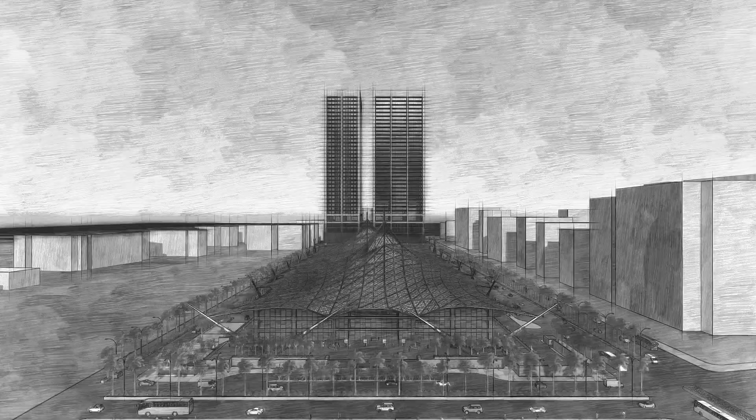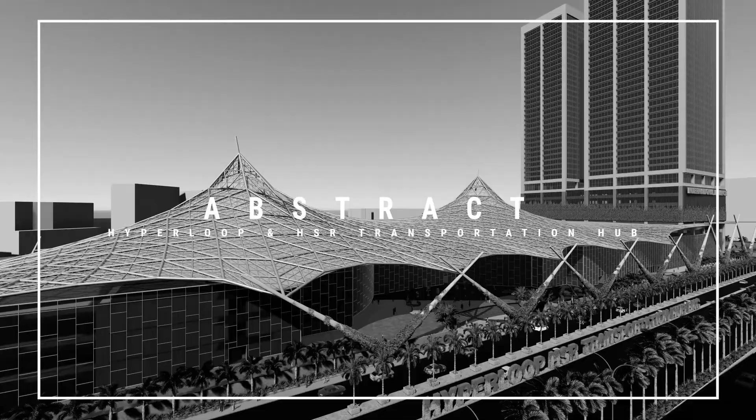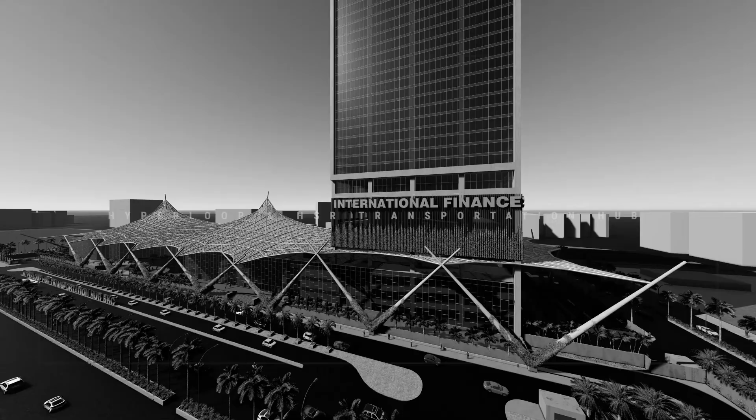Advancing technology and rapid urbanization has led to a resurgence in population growth, which pushes the transport system to simultaneously expand, improve, and innovate. India, being one of the fastest growing economies, invites the proposal of Hyperloop and HSR as a means of travel and the International Finance Service Center for its commerce.

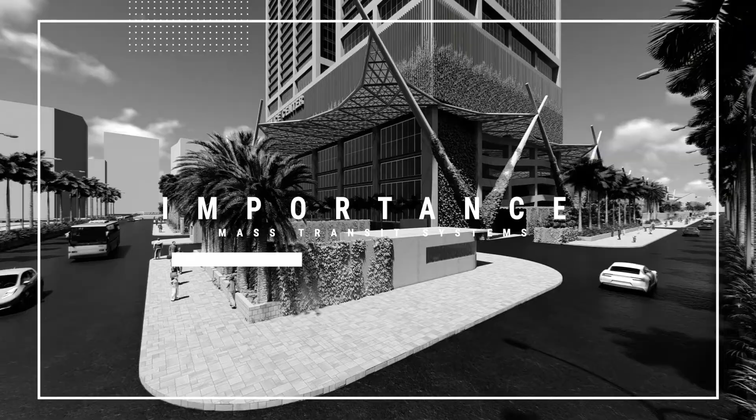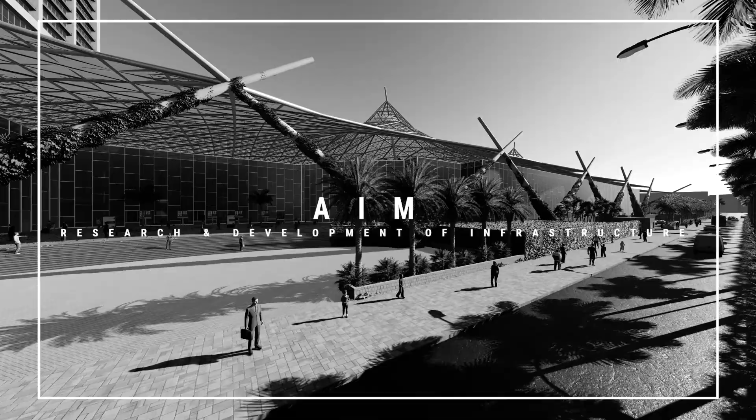The means of inter and intra-city movement is a critical element for defining a city's physical, social, and economical characteristics. Mass transit systems are vital not only for the smooth functioning of the city but also for creating its identity. The thesis aims for research and development of infrastructure of the proposed Hyperloop and HSR transportation hub as a mixed-use development, integrating the proposed International Finance Service Center. The system, being at the innovation forefront of transportation, demanded a research-oriented design procedure, which was the USP of the project.

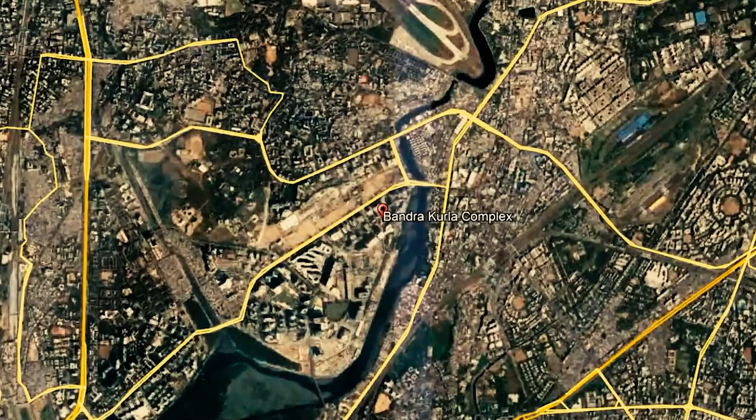The HSR and Hyperloop line is proposed from Ahmedabad to Mumbai and Mumbai to Pune, creating an opportunity for an integrated mixed-use transportation hub starting from the Bandra Kurla Complex, which is one of the most prominent planned business districts.

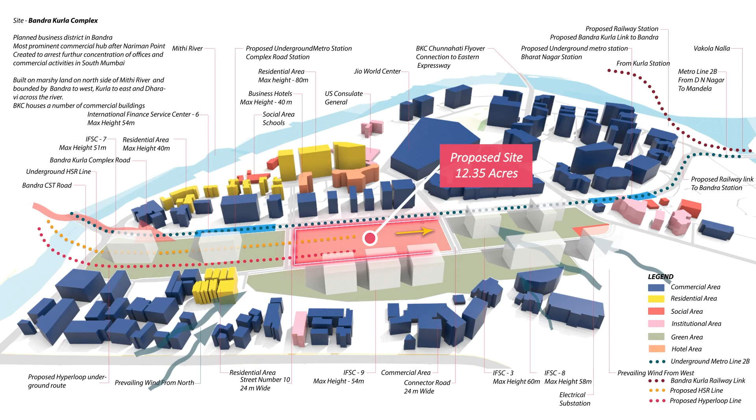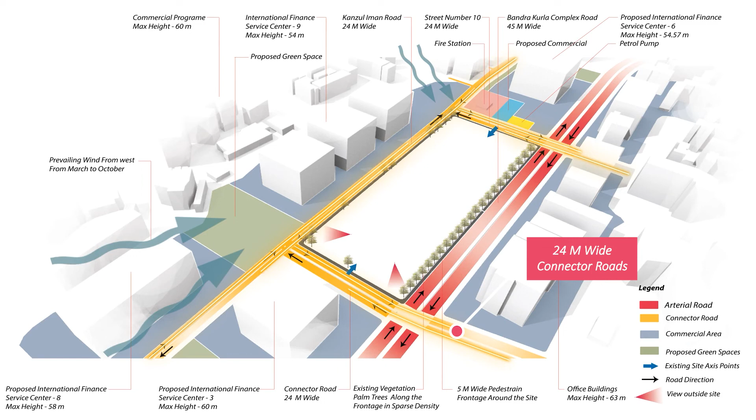The site, being accessible from all four sides, a central location in BKC, connectivity to other transit systems, and a proposal of International Finance Service Center gives an opportunity to create an icon for the precinct and an identity for the city due to the typology of the project and the corresponding context.

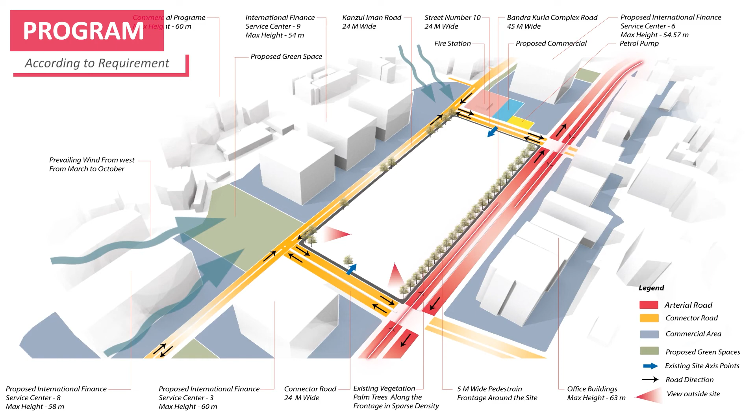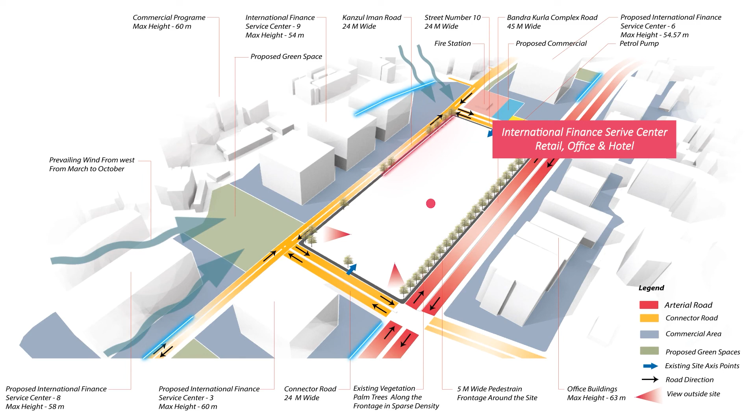The site, with an area of 12.35 acres and allowable FAR4, houses two components of functional program, namely HSR and Hyperloop Transportation Hub, and International Finance Service Center, which is subdivided into retail, office, and hotel spaces based on the requirement of the site.

The vision was to create a gateway which not only helps in the smooth functioning of the city but also creates its identity. The design aims to express movement and importance of urban infrastructure through its futuristic architecture, program, and scale.

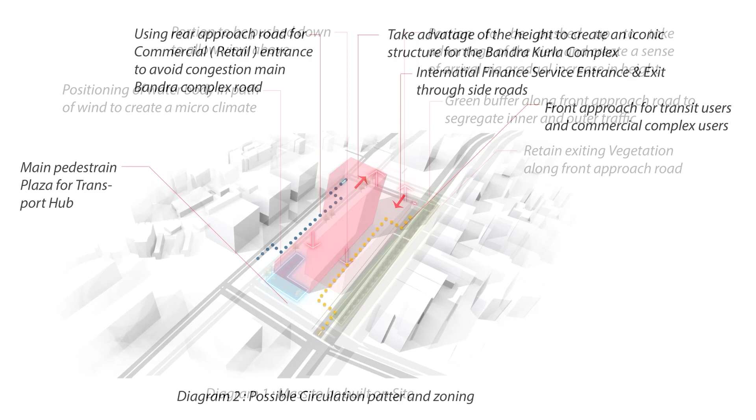As a response to site condition, position of water body and green buffer was conceptualized. Efficient and segregated circulation pattern for different typology of users were fixed, which resulted in a conceptual massing and zoning of different functional programs for the project.

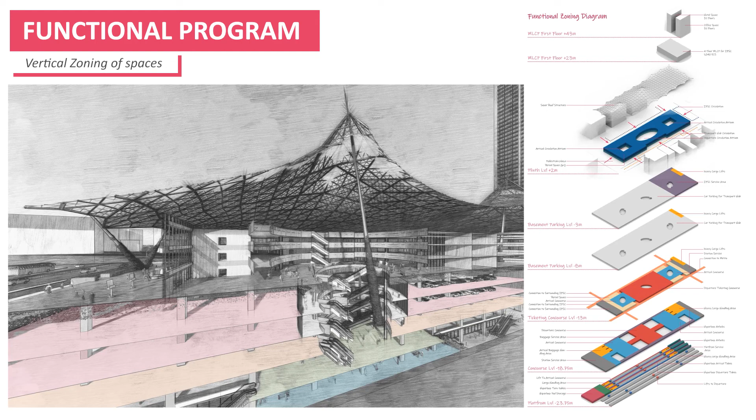Due to the complex program, vertical zoning of different typology of functions addresses a unique solution to the segregation and circulation required for each function.

The ground level acts as a main entryway for the transportation hub, planned with sufficient retail activity to support the commerce, which extends beyond, creating an open recreational rooftop cafeteria.

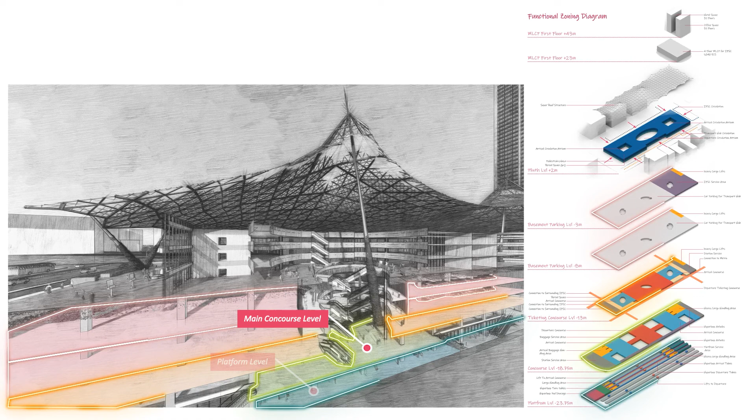The station is sliced vertically into 5 sections that support car parking and service spaces, ticketing and administrative spaces, main concourse level, and the platform level at its proposed level underground.

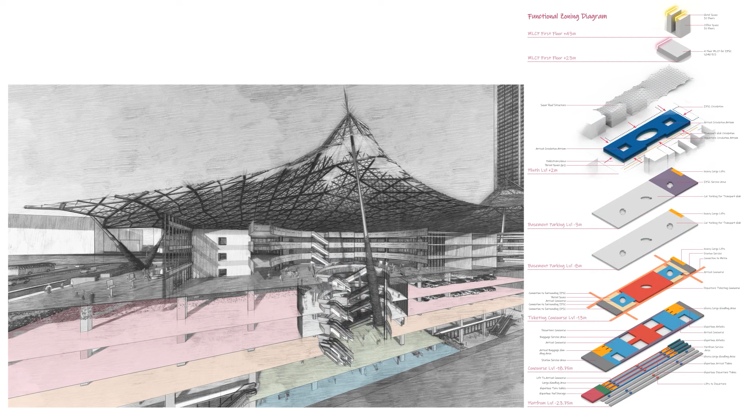To avoid chaos and maintain a smooth flow, the sections are horizontally divided to segregate arriving and departing passengers with segregated facilities and vertical circulation elements. Above the roof structure, the International Finance Service Center is designed with its supported multi-level car parking spaces.

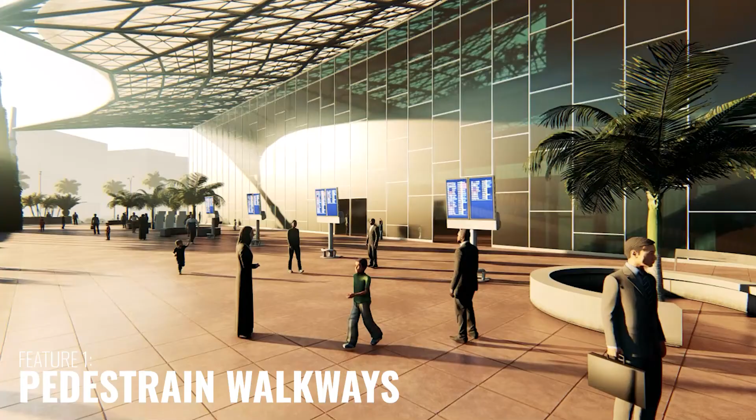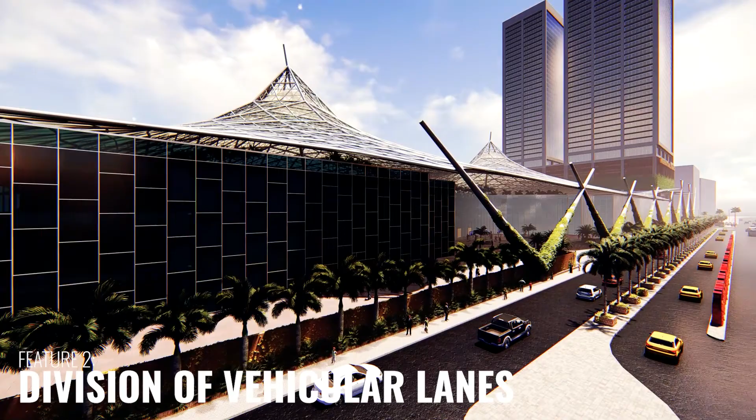The design centers around the expression of pedestrian movement in and around the transportation hub, providing a continuous pedestrian path with breaks at regular intervals. The vehicular internal roads have been segregated for private and public transport to maintain smooth flow of vehicles and avoid traffic.

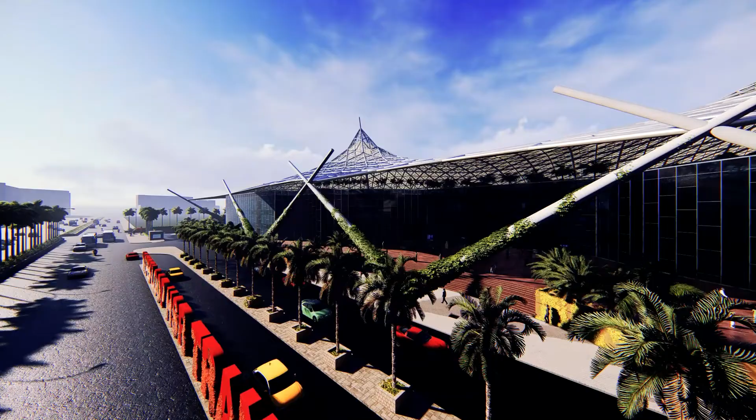The design follows a hierarchy in the planning of spaces that complements the nature and character of the transportation hub. The view of the pedestrian node depicts this nature, scale, and edge of the building.

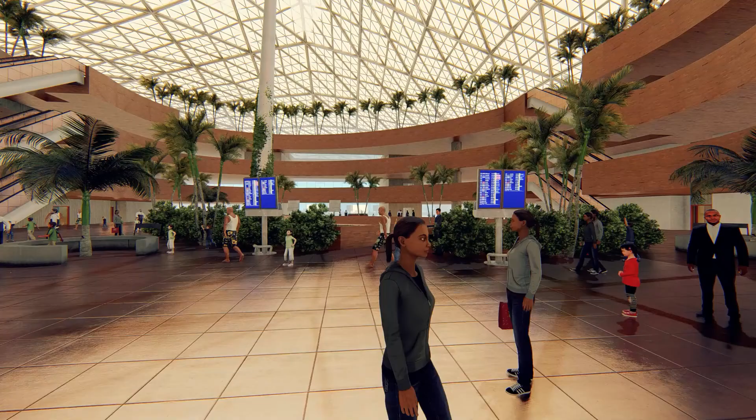The interior space is divided into horizontal and vertical layers, creating voids inside the mass that are used to guide the movement of people through the building. The section reflects upon the vertical voids and gives an idea of the nature and scale of the space created.

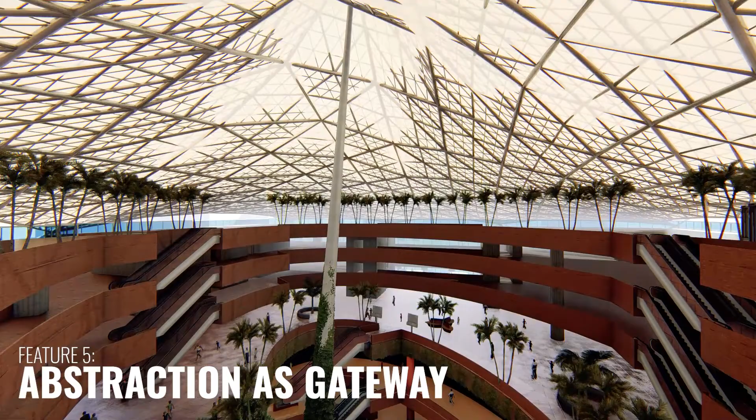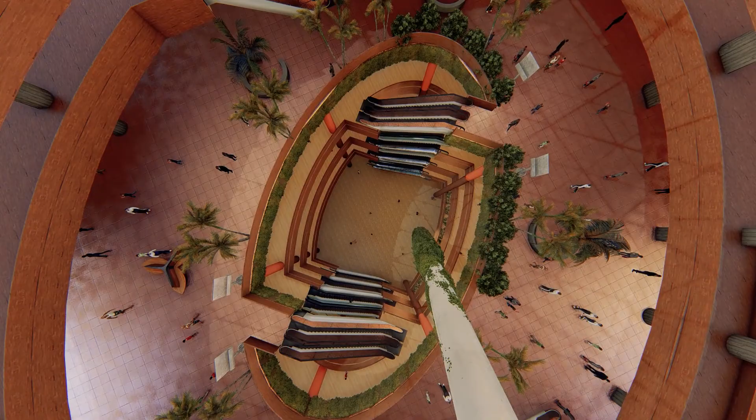The design focuses on the abstraction of the transportation hub as a gateway to the city. The void that extends till the main concourse level of the station, with changing functions at different levels and covered by a super roof system, gives an abstraction of people departing and alighting through this gateway.

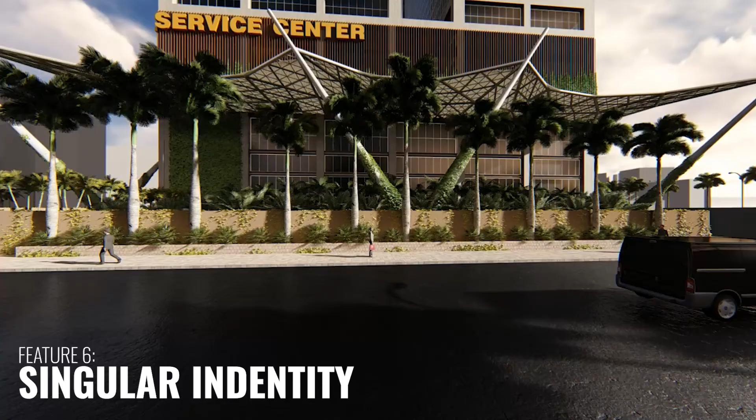The roof structure extends to create a porch and a separate entrance for the users of the International Finance Service Center, which gives singularity to the entire project.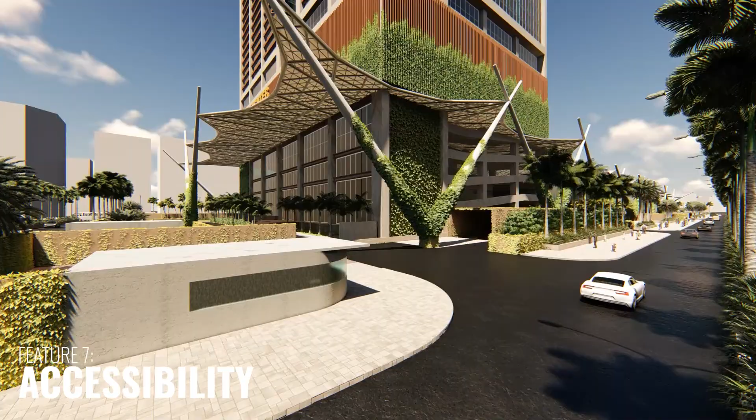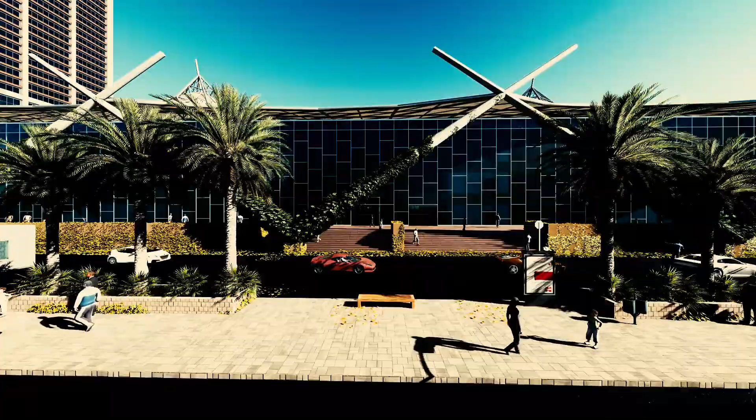The back approach road makes way for the service entrance of the International Finance Service Center and the exit for the multi-level car parking, avoiding congestion on the main side of the International Finance Service Center. It also aids direct entrances to the retail spaces and basement car parking spaces to avoid congestion at the main Bandra Kurla Complex road.

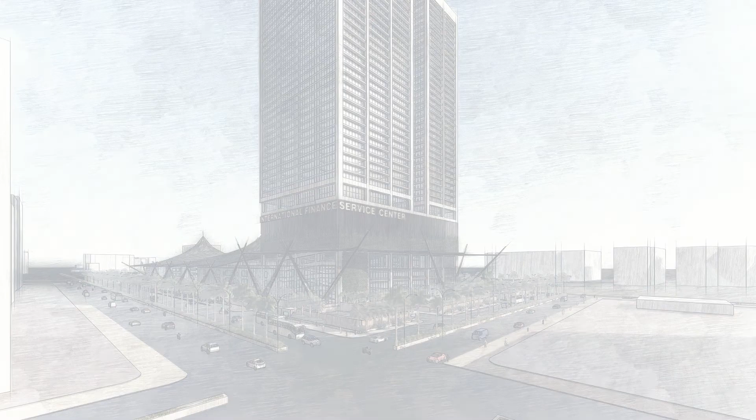The final design for the Transportation Hub was achieved through iteration of design possibilities. Being one of the most advanced means of transportation, the infrastructure becomes a crucial element in determining and defining the city's physical, social, and economical characteristics, responsible not only for the smooth functioning of the city but also for creating its identity.

The proposal expressed movement through its hierarchy of spaces and creation of vertical and horizontal voids that guide the movement of commuters, giving them an essence of alighting or departing through a gateway of the city.